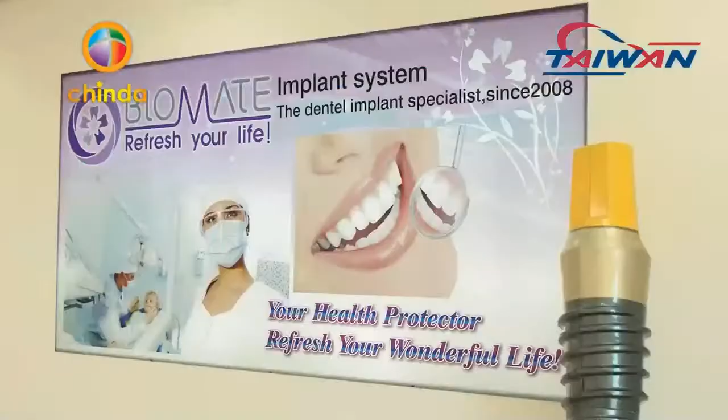has successfully set foot in the medical device industry, producing dental implants and related medical instruments. Taiwan Shan provides the best quality products at reasonable prices, punctual delivery, and prompt after-sales service, which have gained lots of positive feedback from customers in more than 30 countries.

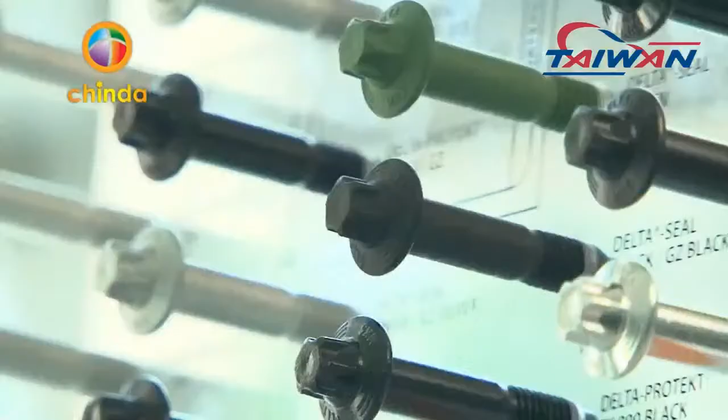In order to serve more customers and satisfy ever-growing market demand, Taiwan Shan set up Sofasco Industry in June 1989 in Malaysia to extend its global operations.

While being in line with international standards, the company was ISO 9002 certified in 1997, and later QS 9000 in 2000. With continuous innovation and improvement, it achieved certification for ISO TS 16949, the Automobile Quality Management System, in 2006, and was certified by CNLA, Chinese National Laboratory Accreditation, in 2001, to provide reliable products and outstanding service to each customer.

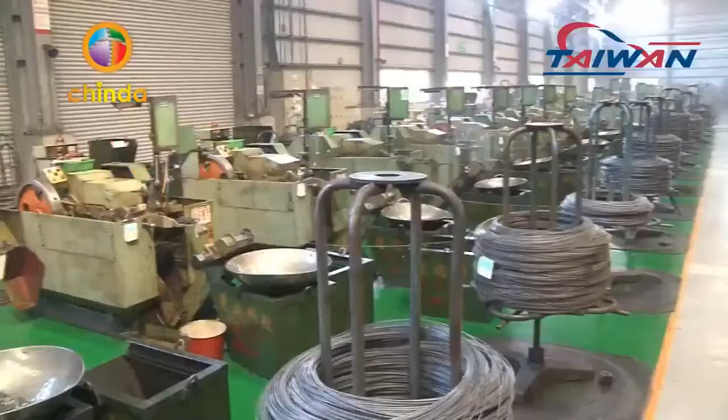With more than 26 years of unceasing research and professional operation, Taiwan Shan is proud to offer the highest quality products and the best manufacturing techniques, as well as perfect solutions and a complete set of services to meet diversified demands of global customers. With unceasing efforts in research and innovation, Taiwan Shan is devoted to becoming a global professional

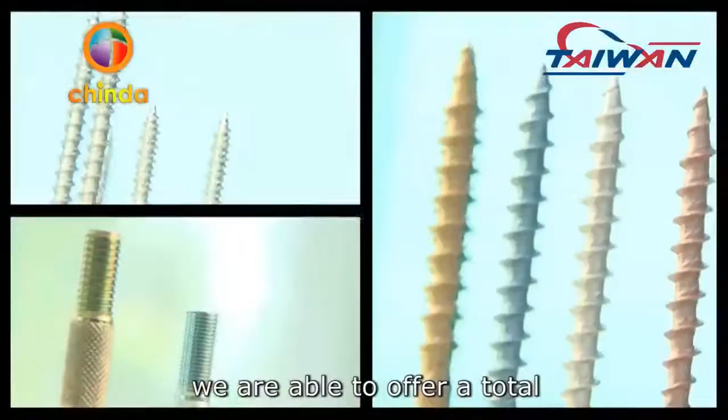manufacturer of screws. After more than 26 years of production experience, we are able to offer a total integration solution to our customers, whether it is for standard or customized products.

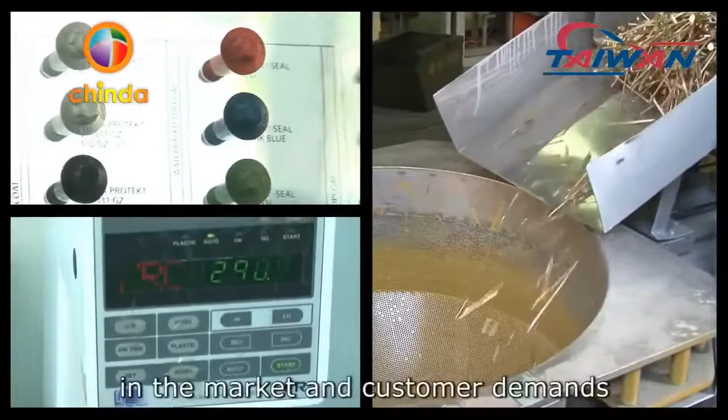Through an integrated up and downstream supply chain, we are able to respond to the fast changes in the market and customer demands, increase customer satisfaction, and global competitiveness.

Besides the continuous pursuit of competitiveness and stable profit earning, we also take on social responsibilities, such as the production of professional screws used for green buildings, and strict control over the disposal of wastes and oil from the manufacturing process that may be harmful to the environment, to decrease the impact on the environment.

To contribute to a better future, Taiwan Shan endeavors to the development of biotechnology and medical devices to benefit more people and meet the diversified needs of the modern world.

The company will be proud to carry on its sustainability management to pursue a stable and solid expansion, as well as provide the best products and services to customers all over the world.

From its beginnings in 1998, ScrewTech has since become one of the world's leading manufacturers of precision screws and parts for both the domestic and international electronics and automotive industries.

ScrewTech has its headquarters and main factory in Taiwan and has 2 factories in China. ScrewTech has prided itself on being able to cultivate dynamic relationships with customers, develop a depth of R&D experience, and meet strict customer demands and deadlines.

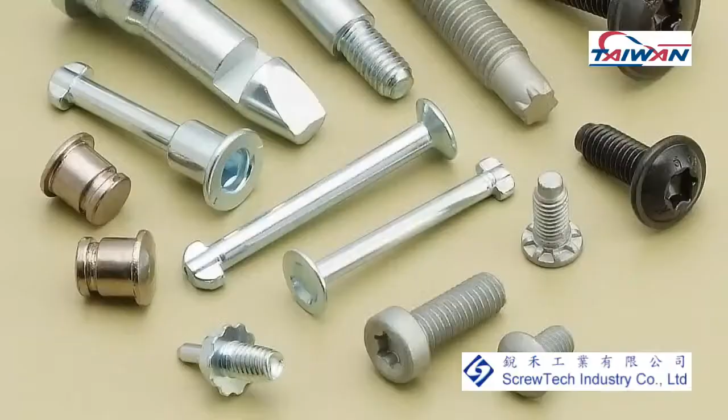ScrewTech is ISO 9001 certified and has IATF 16949 certification for the automotive industry. ScrewTech also has IECQ QC 080000 certification for environmental protection.

Its production ranges from the manufacture of simple parts to a wide variety of finished precision screws, screw assemblies, machined parts, and springs according to client requirements.

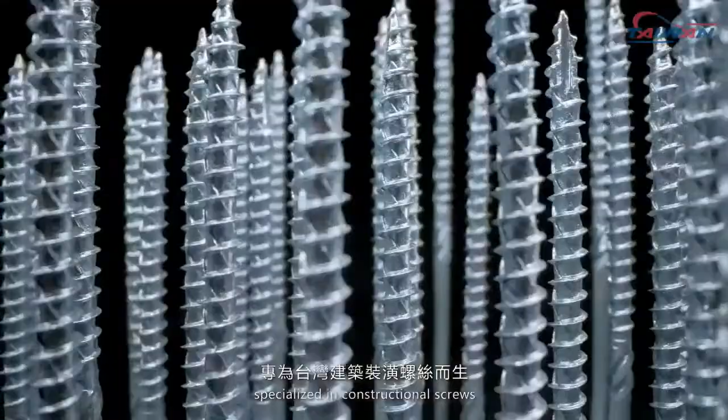Fong was founded in 1986. It is a Taiwanese fastener manufacturer specialized in constructional screws, providing professional service and quality guarantee.

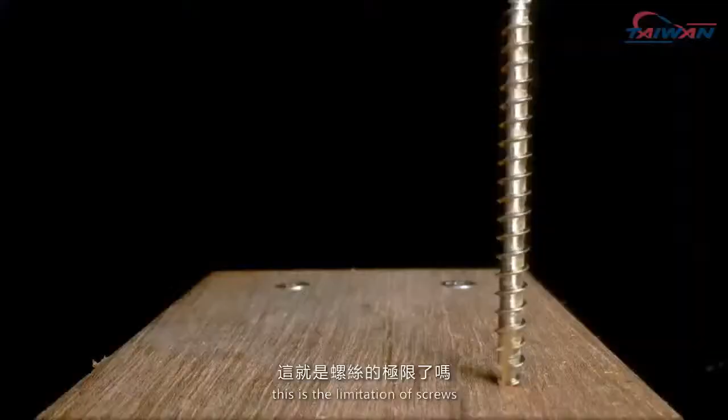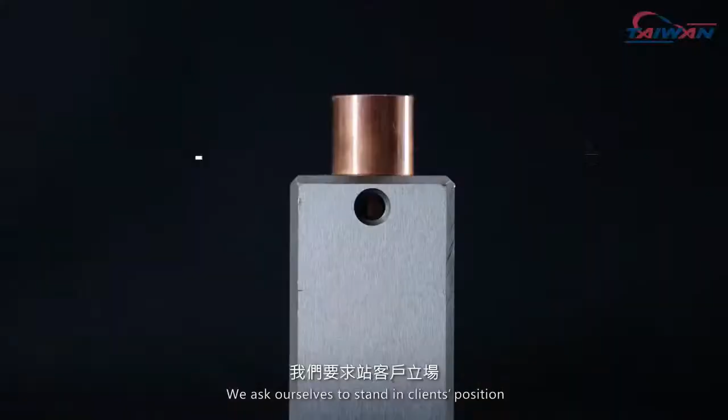If you think this is the limitation of screws, you are limited by your imagination. To meet clients' special requests, we not only design drawings, but also produce samples using 3D printing to discuss and increase our success. We ask ourselves to stand in the client's position and think outside of the box.

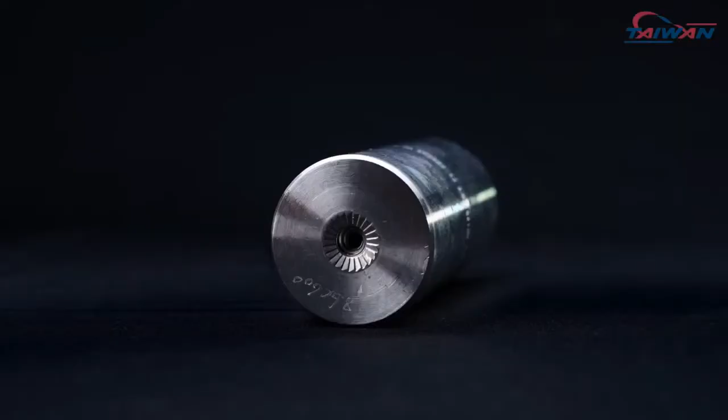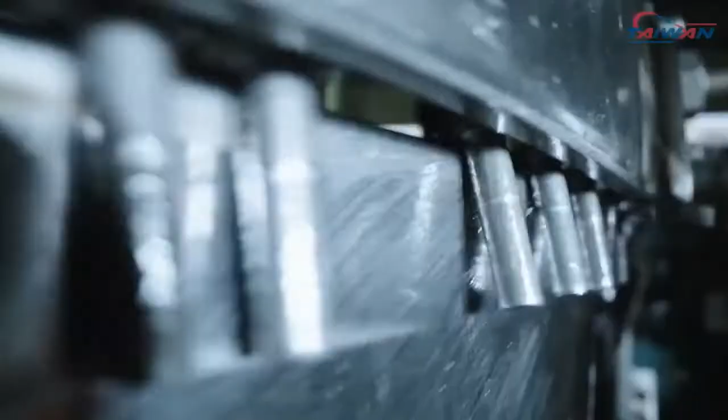We research and design, from mold, recess, head, thread, point, all the way to coating.

You can dream big, and we can help. So far, we have developed at least 17 patented screws.

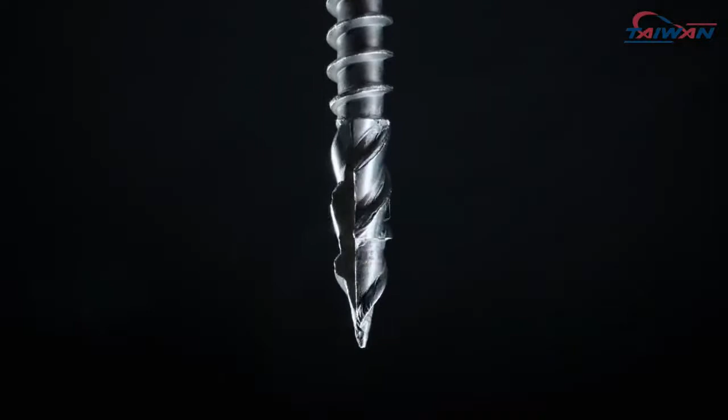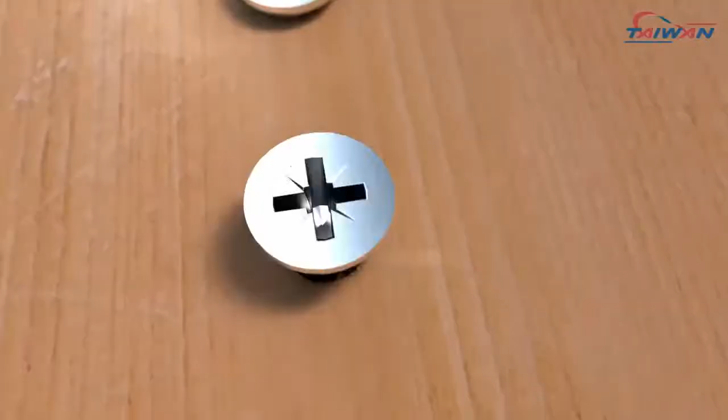The screws look unique and have their own specialty. It is not only a small screw, it is filled with lots of details from inside to outside. By those details, we can help you fulfill the market's needs, expand competitiveness, and easily make products reach customers around the world. We live for solving problems.

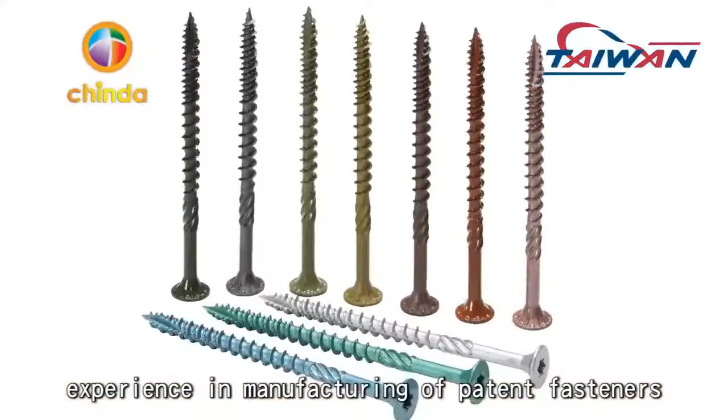Founded in 1984, Taiwan Shanyin International Company Limited is a multinational enterprise group with 5 factories domestically and internationally. After more than 26 years of professional experience in manufacturing patent fasteners, auto parts, and standard fasteners, the company has successfully set foot in the medical device industry, producing dental implants and related medical instruments. Taiwan Shanyin provides the best quality products at reasonable prices, punctual delivery, and prompt after-sales service, which have gained positive feedback from customers in more than 30 countries.

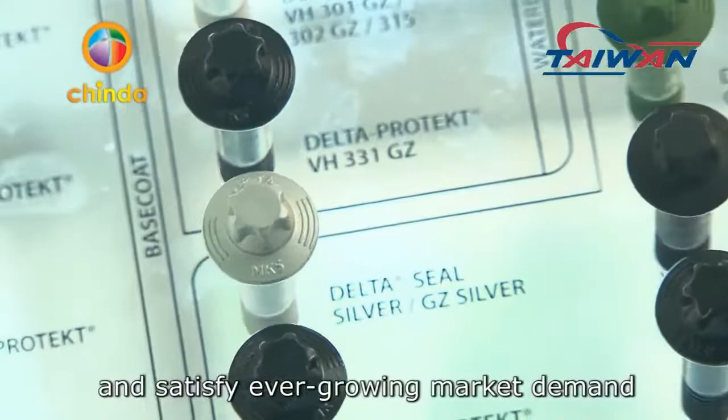In order to serve more customers and satisfy ever-growing market demand, Taiwan Shanyin set up Sofasco Industry in June 1989 in Malaysia to extend its global operations. While being in line with international standards, the company was ISO 9002 certified in 1997, and later QS 9000 in 2000. With continuous innovation and improvement, it achieved certification for ISO TS 16949, the Automobile Quality Management System, in 2006, and was certified by CNLA, Chinese National Laboratory Accreditation, in 2001, to provide reliable products and outstanding service to each customer.

With more than 26 years of unceasing research and professional operation, Taiwan Shanyin is proud to offer the highest quality products and the best manufacturing techniques, as well as perfect solutions and a complete set of services to meet diversified demands of global customers.

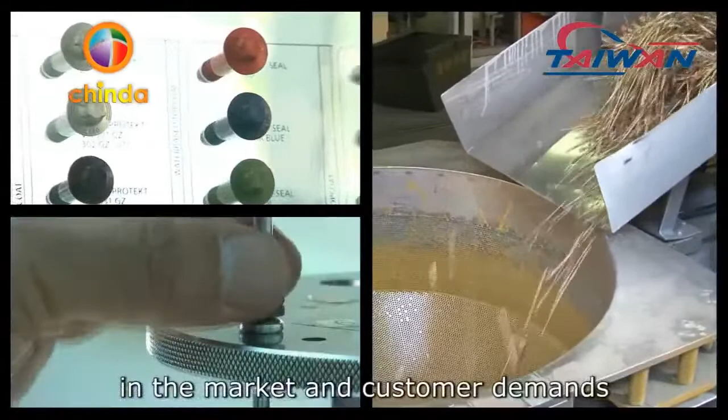With unceasing efforts in research and innovation, Taiwan Shanyin is devoted to becoming a global professional manufacturer of screws. After more than 26 years of production experience, we are able to offer a total integration solution to our customers, whether for standard or customized products. Through an integrated up and downstream supply chain, we are able to respond to fast changes in the market and customer demands, increasing customer satisfaction and global competitiveness.

Besides the continuous pursuit of competitiveness and stable profit earning, we also take on social responsibilities, such as the production of professional screws used for green buildings, and strict control over the disposal of wastes and oil from the manufacturing process that may be harmful to the environment, to decrease the impact on the environment. To contribute to a better future, Taiwan Shanyin endeavors to the development of biotechnology and medical devices to benefit more people and meet the diversified needs of the modern world.

The company will be proud to carry on its sustainability management to pursue a stable and solid expansion, as well as provide the best products and services to customers all over the world.

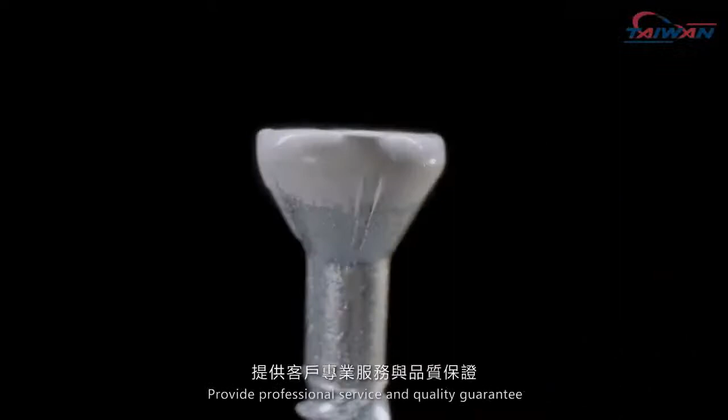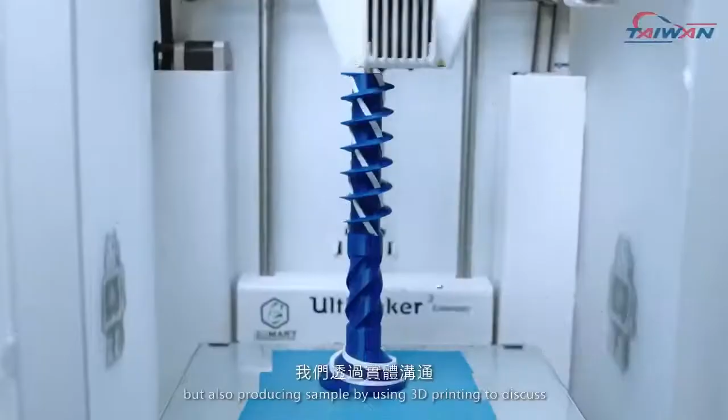Fong was founded in 1986. It is a Taiwanese fastener manufacturer specialized in constructional screws, providing professional service and quality guarantee. If you think this is the limitation of screws, you are limited by your imagination. To meet clients' special requests, we not only design drawings, but also produce samples using 3D printing to discuss and increase our success. We ask ourselves to stand in clients' position and think outside of the box.

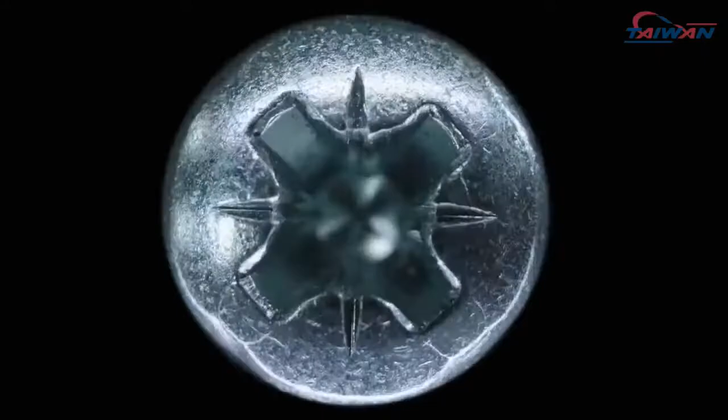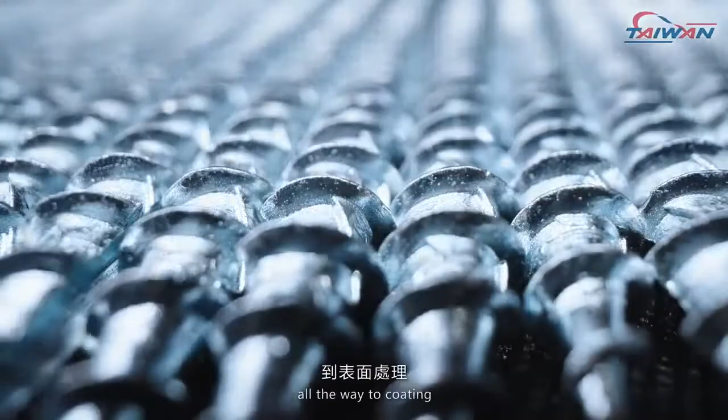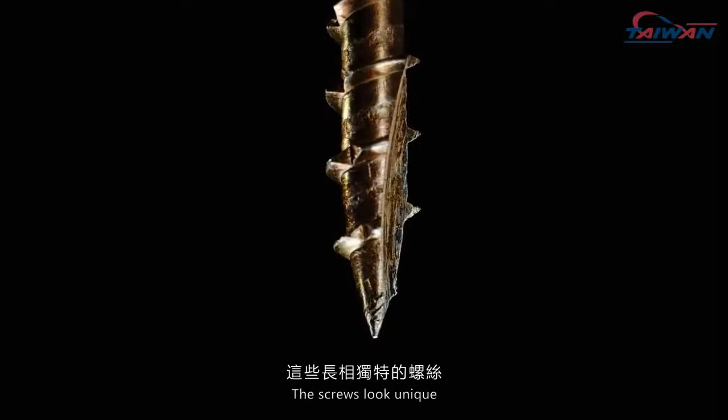We research and design from mold, recess, head, thread, point, all the way to coating. You can dream big, and we can help. So far, we have developed at least 17 patented screws. The screws look unique and have their own specialty. It is not only a small screw, it is filled with lots of details from inside to outside. By those details, we can help you fulfill market needs, expand competitiveness, and easily make products reach customers around the world. We live for solving problems.

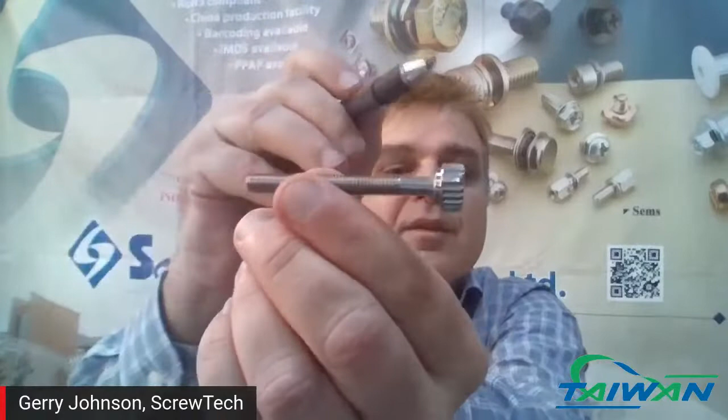Here's another one with a special head, and you can see the head is very special. It's like a key, so this is for mounting a bicycle onto a car. This is for a bicycle mount, and you can see the special orientation for this key. We've made a number of these.

This is another one related to the automotive industry, but it's not automotive itself. This is for a water pump, and you can see this is a combination pin with a special thread at the end. So this goes inside a water pump somewhere as a grounding strip.

Let me show you another one. We also do non-threaded parts, both threaded and non-threaded. This is an example of a non-threaded pin for the automotive industry, for brake pads, specifically a brake shoe pad. You can see it has an orientation on the end, and also on the recess here. This is also very popular now in Europe.

Then if I go over to another type of part that we make, we also supply these special Sems for the electronics industry. You can see this is a special square washer, and we do all kinds of washers.

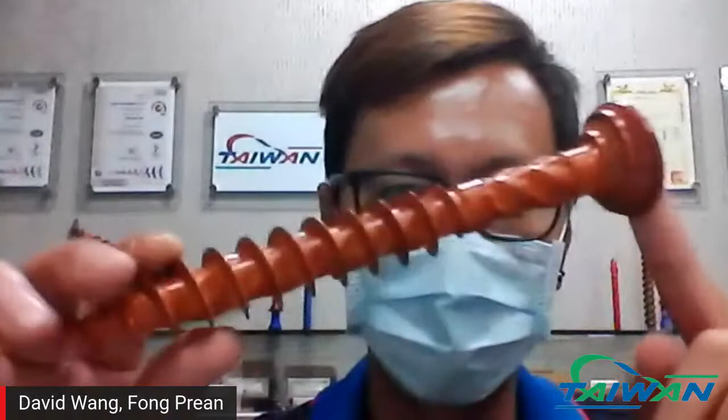Well, I'm going to introduce two of our patent products for today. The first one is our MS Twister. It's a wood screw with our MS head that will perfect the finished surface and leave it clean and flush with no burrs on the application.

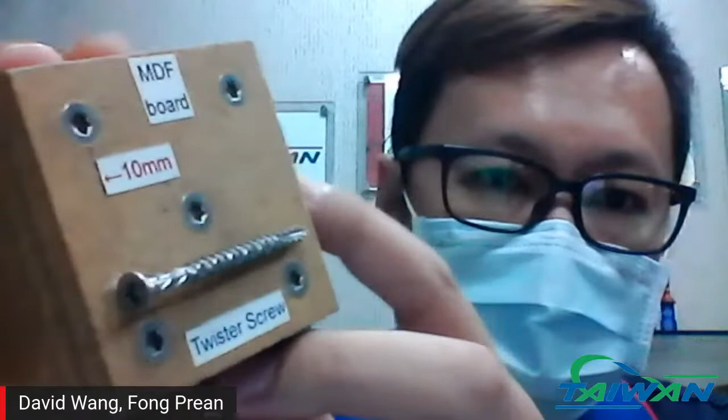I have a sample here, it's with the MDF. I think it's not that clear that you can see, but you can see that the surface was done with this, and you don't really have to do any cleaning or after jobs on the surface.

And this one's for chipboards, you can see it's pretty much the same as well. With our twisted threads, it has a low driving torque and high holding power, and it will also stop splitting even when we drill it in the edge. That's the main point of our patent threads. And when it lowers the driving torque and raises the holding power, it makes it easier for workers to do their jobs and save time.

The other one is our 12 rib. It's for cement board screws, and because the market for cement board screws is getting more popular, we have designed the 12 ribs, which is like this.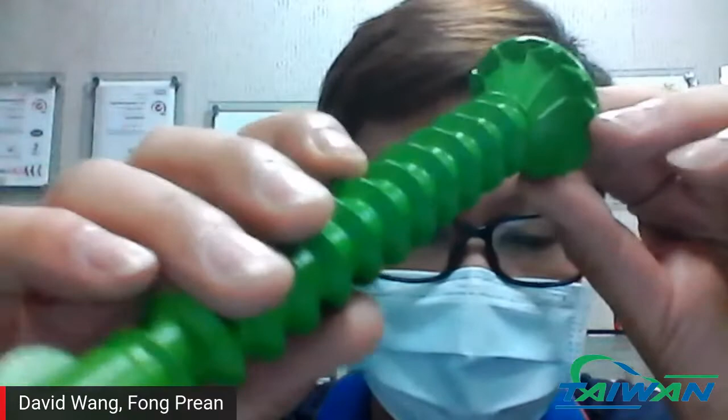The special ribs on the head also make a perfect countersunk with a clean surface and no burrs, so you don't have to do any extra work afterward, like pre-drilling and then putting stuff on it to make the surface clean, as if nothing had been drilled before.

Right, so you're saving time with every screw, and that adds up to a lot of saved time. Fantastic. Yeah, so if I may ask an impertinent follow-up question...

Can you give us the main advantage for buyers sourcing from Fong Prean, in terms of what you offer them as well as the unique products? Well, we basically produce products according to our clients' needs. Even though we have different sizes and slightly changed designs for our patent screws, it always depends on the customers' applications and special needs, like for coating as well. We can do normal zinc plating, and we also have Geomet and some other coatings as well.

All right, thank you very much. So, thank you for sharing your products with us as well, David. I hope, as with the others, we can speak again sometime soon, maybe even in person if trade shows get going again, who knows. Yeah, but thank you for joining us today anyway. Thank you very much, Tom.